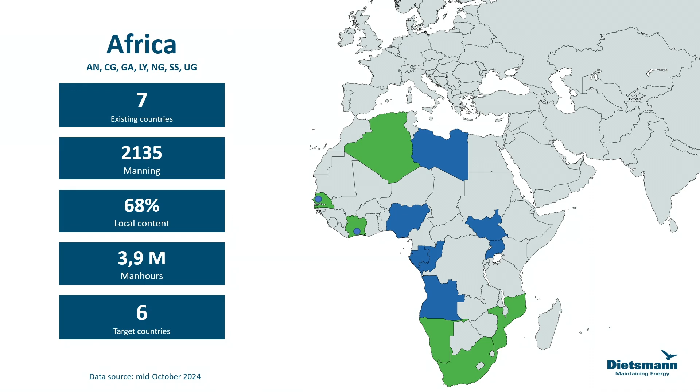Environmental data. We are very committed to the energy transition, and also to decreasing our emissions on the 3 scopes: scope 1, scope 2, and scope 3. Being a maintenance contractor, scope 2 is a little bit smaller compared to scope 1. Scope 3 is mainly based on the logistics, on the travels that our people are subject to reach the different sites. We set a parkour to become net zero in 2040.

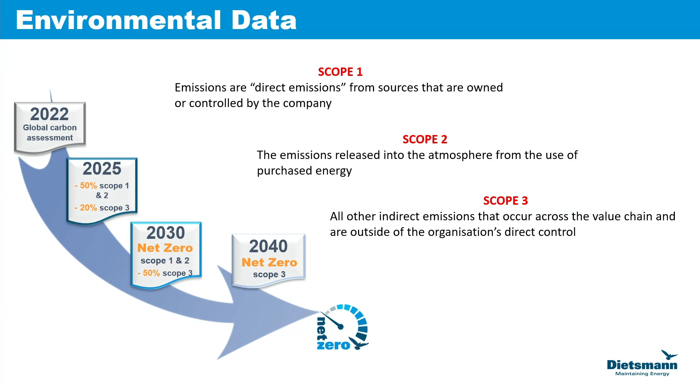So basically, we had an assessment 2 years ago. In 2025, we are expected to reduce by 50% our emissions of scope 1 and 2, and minus 20% on scope 3. By 2030, we will become net zero on scope 1 and 2, and then 2040, as I said before, it's our target for scope 3.

This is a picture of how much emission we have today within our company. As I said before, scope 2 is a little bit smaller than the others. The vast majority is scope 1 and scope 3.

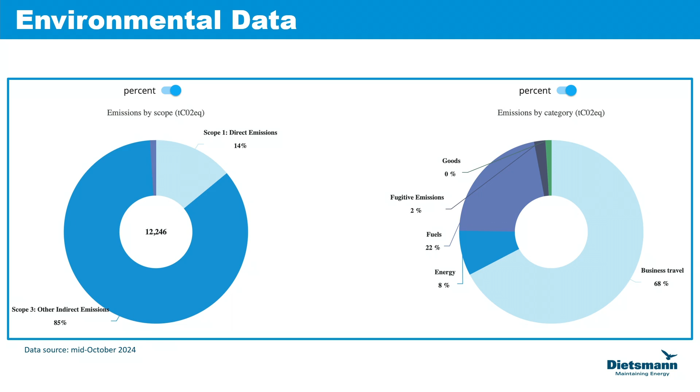Maintenance strategy. We are a maintenance service provider, so we know very well how maintenance has to be done. The difference between the past, the present, and the future is how we would like to improve the maintenance strategy on our side, but also in collaboration with our clients.

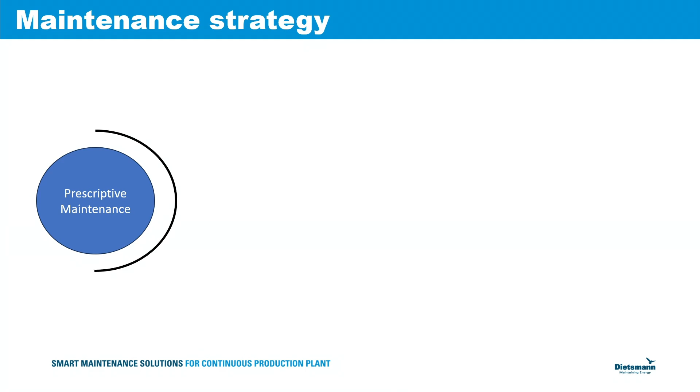We would like to go to the point that prescriptive maintenance would be our pillar, our unique value proposition. Prescriptive maintenance will allow us to reschedule the preventative maintenance, to reduce the maintenance cost. This is very important also for our clients, to improve the workforce, because the manual activities will be developed into something more modern, decrease the unplanned downtime, so for the clients in terms of production, flow rate, and availability, there will be a big step up in reliability and availability.

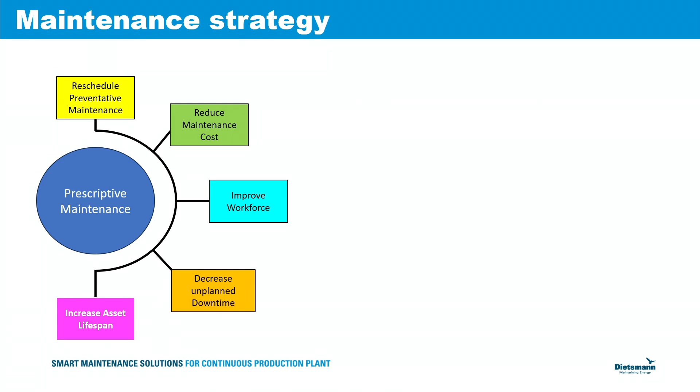And we would like to participate in increasing their asset lifespan. Basically, the delay is one of the key components of what we are working on, so we try to reduce as much as possible the delay in moving our people throughout the different sites.

The backlog, if corrective maintenance, reactive maintenance is what you're doing, the backlog is always a big problem for the contractor, but also for the client. So by going to prescriptive maintenance, the backlog would reduce dramatically.

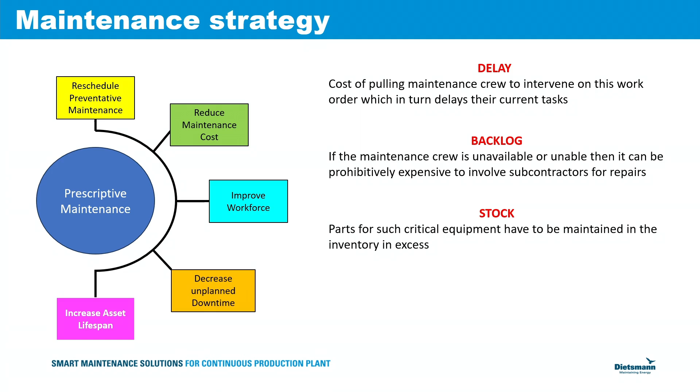The stock, if you implement prescriptive maintenance instead of preventive maintenance, is a huge component on the client cost side, would be dramatically reduced because you would purchase the parts just in time for the replacement. And the shipment of the parts, that is one of the worst nightmares of the client, but also of the contractor, will be optimized by ordering them according to the necessity on site.

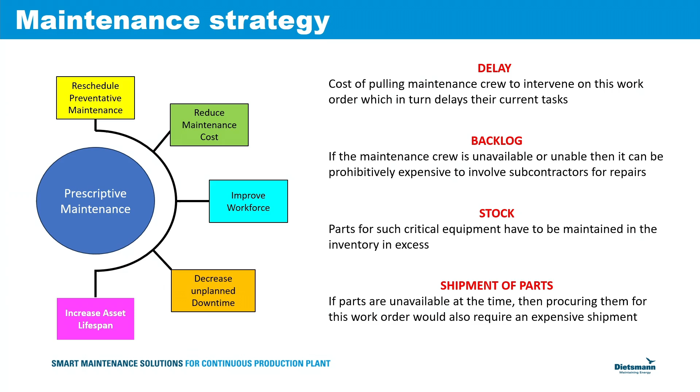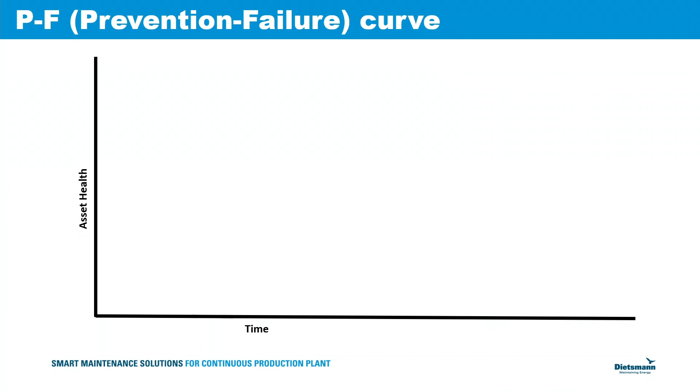Let's talk briefly about the prevention failure curve, that is the heart of this concept. So if on the y-axis we put the asset health and on the x-axis we put the time, we see that for any assets on site there's a decrease of asset health throughout the years.

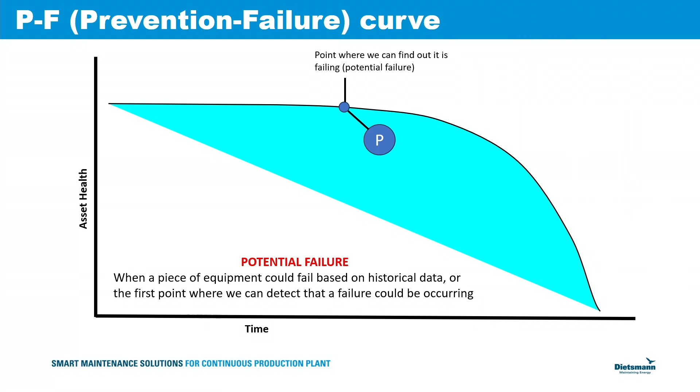So we talk about the potential failure, that is the point where you can find out that something is failing. There's a detection that the failure is there. Of course, there's also a point where the breakdown occurs.

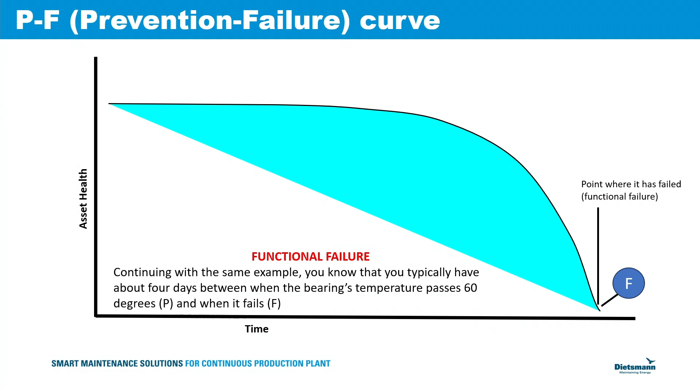So the functional failure is the point where you need to intervene and correct the failure. Compared to the life of a bearing, a very simple example, the potential failure is when a bearing would go over 60 degrees. This is something you detect basically by the instrumentation, and that gives enough time to replace the bearing.

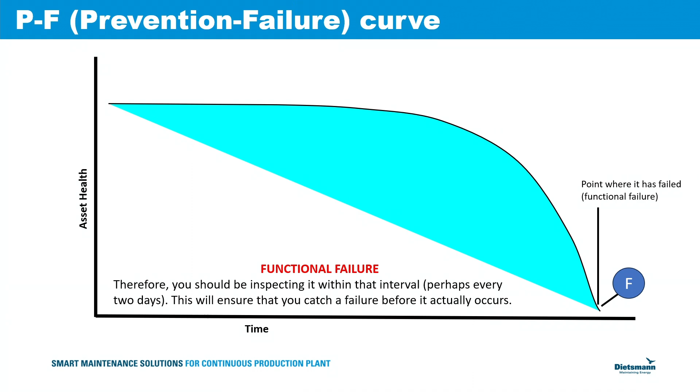The functional failure, of course, dictates the time between the occurrence of the failure and the detection of the failure. And this is where we would like to intervene thanks to artificial intelligence.

The point where the failure starts to occur is not necessarily related to age. You may have it also on new sites, on new installations, because many elements can be behind a failure. So our program is dedicated to old sites as well as new sites.

Potential versus functional. If you can increase the time between the point in which you detect the failure and the point where it actually occurs, that would give ample time for your teams to plan the intervention, to agree with the client the right time to stop the machine, and of course you can improve the reliability.

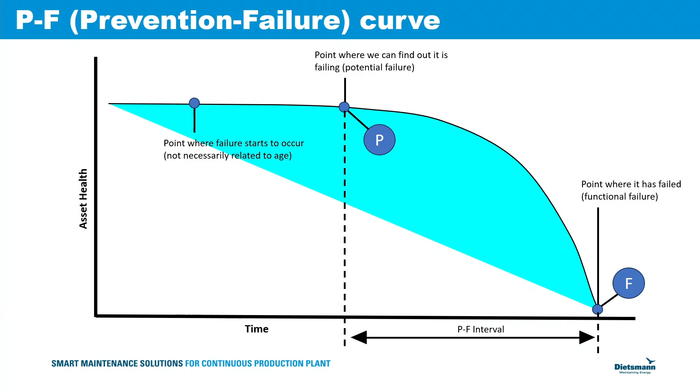Because you already know when the failures will occur, but you can also concur in raising the uptime of the entire facility. This is the PF interval, something we will work on extensively thanks to digital twins and artificial intelligence.

Of course, we try to enlarge this time as much as possible, to have ample time to order the spares, to program, to plan, to get the teams on site for the intervention.

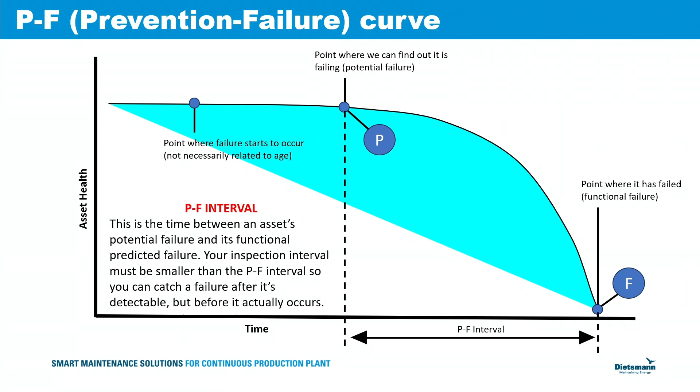What does it mean? That you schedule better the maintenance. So, of course, there will be no last-minute parts delivery, which is also very dangerous for an oil and gas as well as a power station installation.

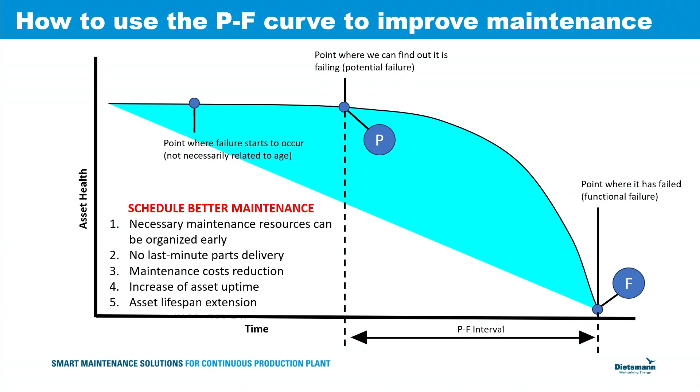You would reduce the cost of the maintenance, because you will order the parts just in time when you need them. So basically the stock in the warehouse of the client will be reduced to the minimum. And then, of course, you increase the asset uptime.

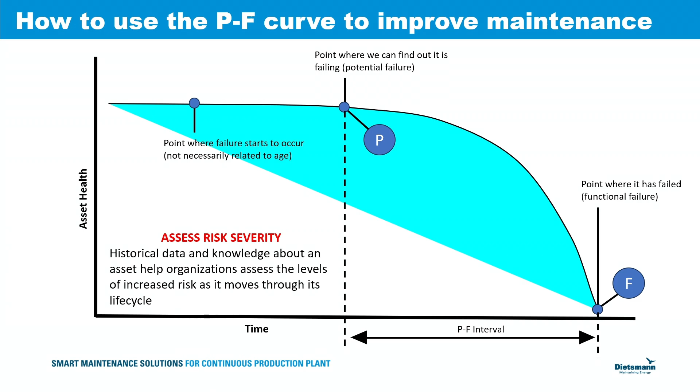The risk severity - in corrective and preventive maintenance, the asset risk is always very difficult to assess in terms of severity. Here, thanks to the historical data and data analytics, you can customize and really set the severity of any and each of the failures that are going to occur.

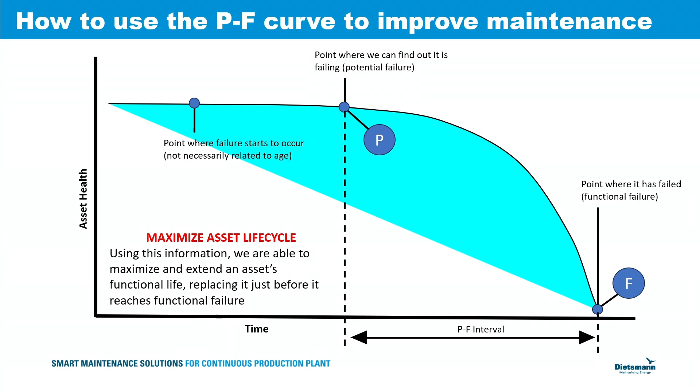There's also a very good contribution in the asset life cycle, because of course you would reduce to zero the unnecessary interventions. You will focus only on something that is extremely vital for the asset and for the entire plant.

Of course, the beauty of it is that Dietsmann collaborates with the clients, and our next target would be to collaborate with the EPC contractors. Because if you can already inject this technology, this concept at a FEED level, at an EPC level, from day one, the client would benefit from having already a maintenance strategy towards prescriptive maintenance.

If a client invests after the startup, it may be already too late for having a good reliability and a good availability of the plant.

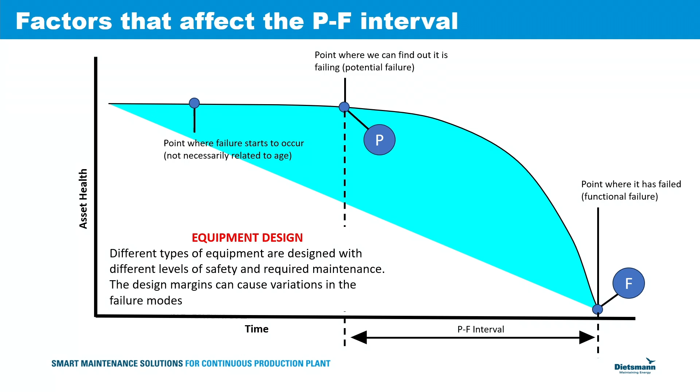There are some factors that may affect this study, the frequency of use. So basically, how you process, how you manage the production. That's why I was talking about operations.

For us, having guys on both sides of the plant, on the maintenance side but also on the operations side, allows a very good understanding of the reciprocal needs.

Maintenance and operations, if taken apart, usually don't communicate, and some problems that stem from operations, if not promptly shared with maintenance, can create huge problems on the maintenance side. Conversely, if the maintenance guys do not share what their intervention was about, the operational people cannot improve the process management. So when we talk about operation and maintenance, it's a joint effort from both the maintenance and the operation guys.

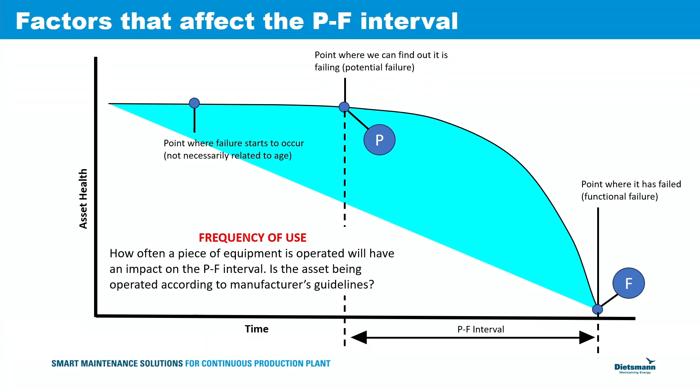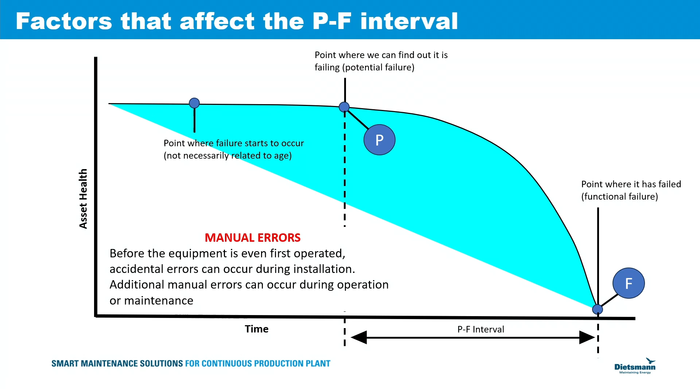Manual errors: statistically, if you operate frequently on a machine, the room for errors can be quite high, notwithstanding the training, the competence, the skills. Human errors, especially in a rush, can be there. So by reducing the frequency of intervention and the activities at site, we would reduce, not to zero, but to a very low level, the room for errors.

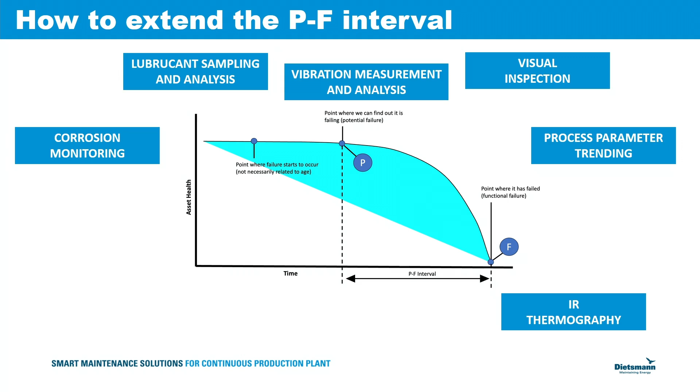How can we go all the way to prescriptive maintenance? We have different components: corrosion monitoring, lubricant sampling and analysis, vibration measurement and analysis, visual inspection, process parameter trending, infrared thermography, acoustic emission detection, and motor current analysis for electrical equipment. Those are components that are already there.

Our target is to integrate all those activities into a package that is, for most of it, automated and managed by artificial intelligence.

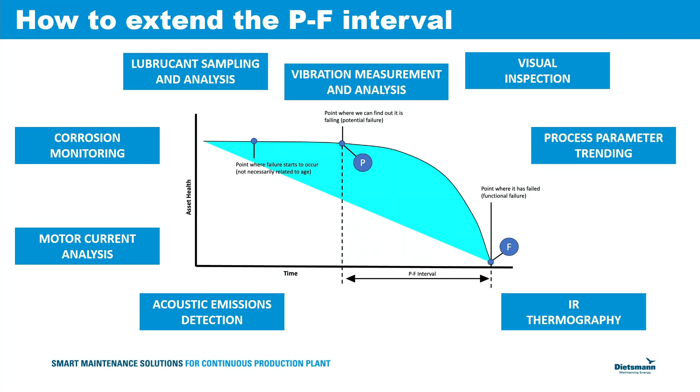The data acquisition would be on each and every second. To be honest, the pickup frequency is 30 milliseconds, so it's real-time data capturing. This generates a huge volume of data that is very vital for forecasting and prediction, but it's impossible for this amount of data to be managed by engineers. So artificial intelligence is a necessary tool to translate this huge amount of data into something suitable for human beings and engineers.

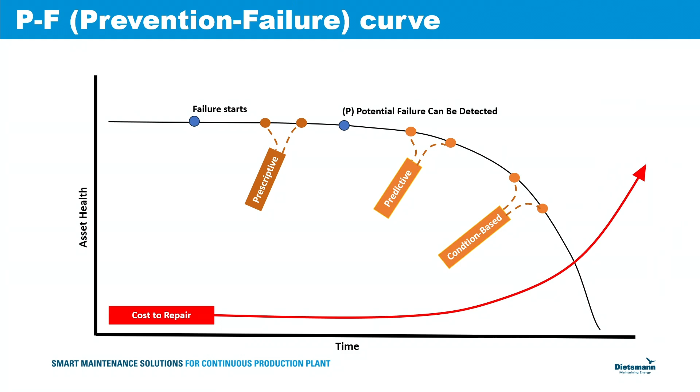But the beauty is that, thanks to prescriptive maintenance, you would be ahead of the detection that is possible today. Today you can only detect the failure after point P. With predictive maintenance, you can only be there. With prescriptive maintenance, you will be ahead of the detection. That's a huge step up in improving the detection of failures and the maintenance quality for our clients.

This is the whole life cycle for preventative maintenance. When you talk about maintenance based on time, it involves a very large span of time—huge investment, huge cost, huge manpower need at site. If you focus on prescriptive maintenance, you can reduce the cost, reduce the requirements for workforce, and also the requirements in terms of parts.

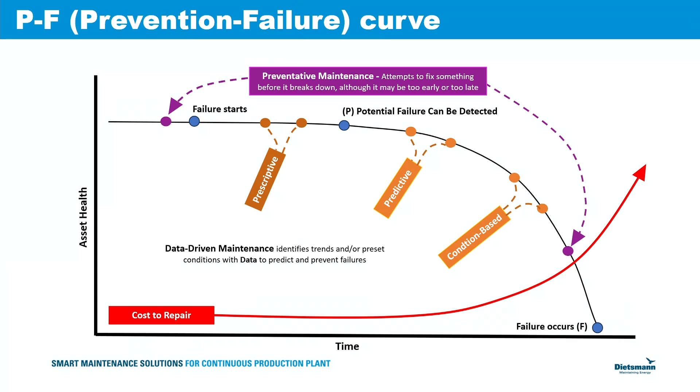This is our goal: maintenance will become very soon driven by data. Acquisition and capturing of data on a real-time basis will allow us to analyze that data and give guidelines to engineers and planners to plan the maintenance according to real and actual needs.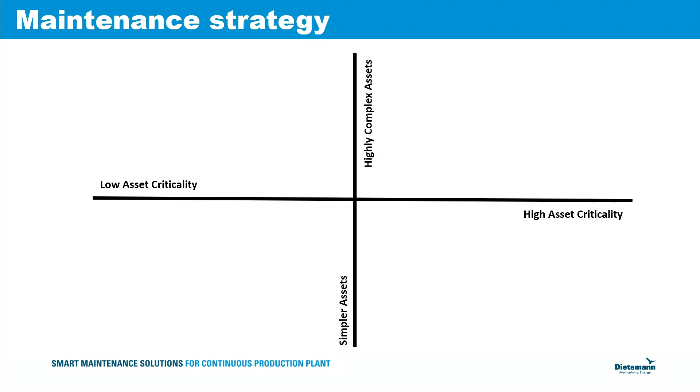Let's speak about what convenience a client can have switching from one type of maintenance to another. If criticality is low to the left and high to the right, and assets are simpler at the bottom and highly complex at the top, here is where usually you are with reactive maintenance—it applies to sites low in criticality and low in complexity. Preventative is somehow more critical, moving towards something more critical and less simple. Condition-based maintenance is somehow there. Predictive, today's most advanced methodology, becomes more interesting where sites are complex and also very critical for export, in terms of electricity or oil and gas production.

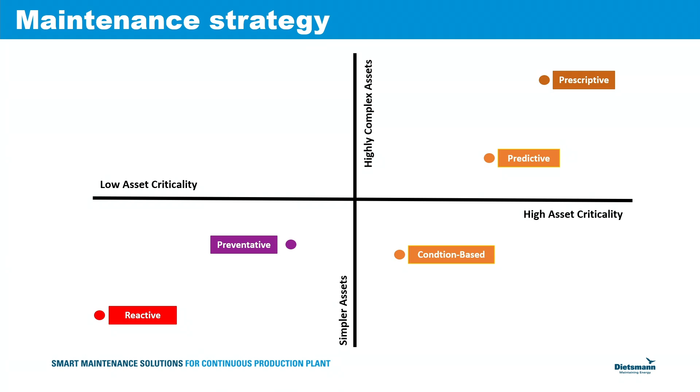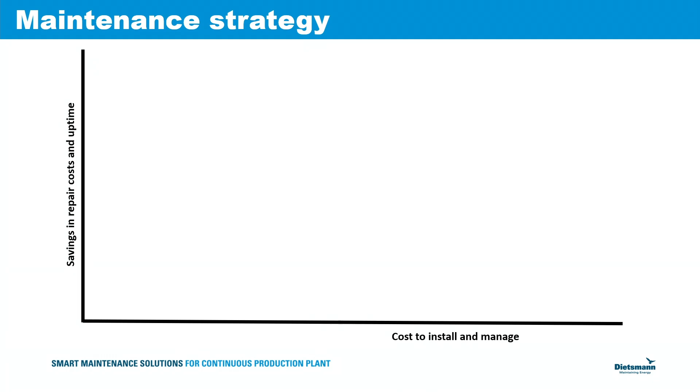Prescriptive is really the pinnacle, the top of everything. Every time you have an asset that is very complex and highly critical for the client, prescriptive maintenance is the answer to the client's needs. In terms of savings and cost reduction on the y-axis versus the cost to install and manage prescriptive maintenance, reactive is very low—it applies where cost reduction isn't so important, but also where investments are quite low and limited.

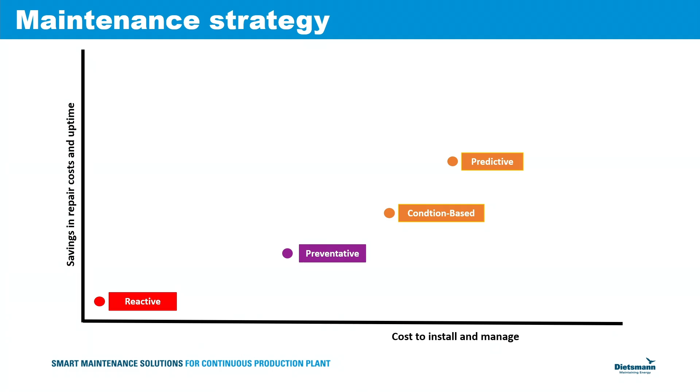Preventative requires additional investments, but also the savings is a little bit higher than reactive. Condition-based, of course, is halfway between preventative and predictive. Prescriptive sets somehow there, and you see that the upfront investment, a one-off investment by the client in terms of sensors and by the contractors in terms of artificial intelligence, would pay off in savings in terms of cost reduction. So prescriptive maintenance on the long run is the answer also to cost reduction.

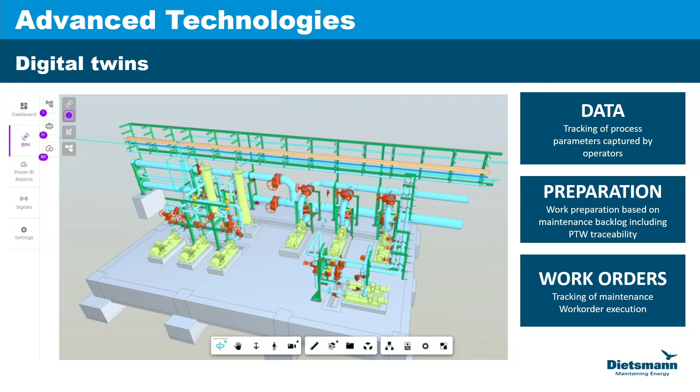Let me give you a very brief overview on our new advanced technologies. So the digital twin is a digital simulation on how the sites work. It allows the data collection, it allows the maintenance preparation, and it also allows the work order management. By having sensors, you can translate the analogic indications into something that is digital.

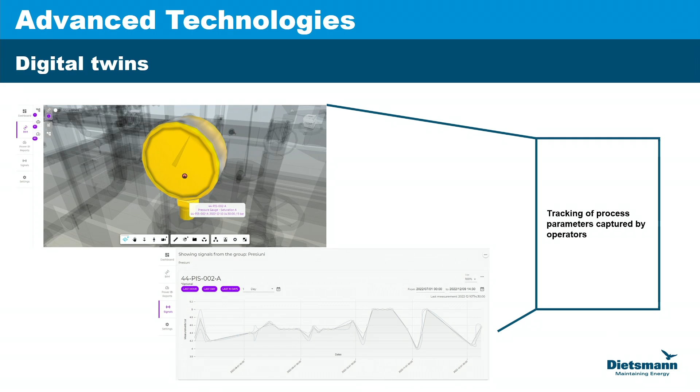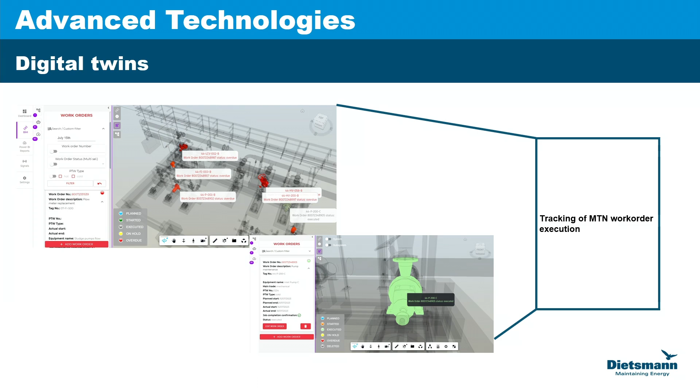For the artificial intelligence this is extremely important. You can manage the work preparation and also the permit to work, so you can decrease the time to prepare the intervention. And then you can track the work order execution, so the client is being kept up to date via mobile phones or other kinds of interfaces on the progress of the intervention.

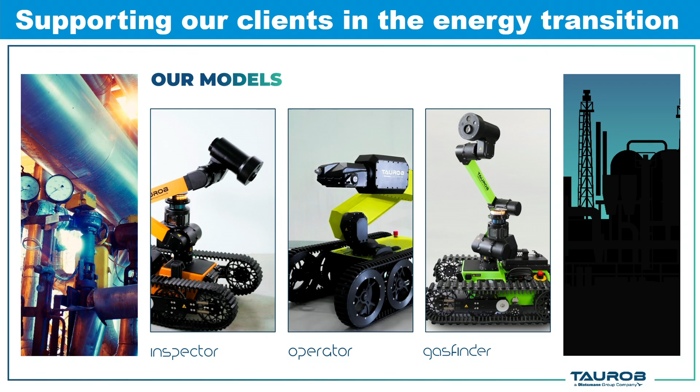In terms of robotics, I'm trying to be brief. We have three models: the inspector, the operator, and the gas finder. The beauty of having the robots operational at site is that you can conduct completely automated, unmanned inspections. The robots can carry out inspections without any control by human beings.

You can get the data acquisition done because the robots are equipped with sensors to collect vibration, infrared thermography, and other sources of data. The robots have installed software so they can get an elaboration of data already aboard the robot. So when the robot downloads or uploads the data into the cloud, where we have all the artificial intelligence, this data is already somehow processed and sorted and filtered by the robots by importance and by consistency.

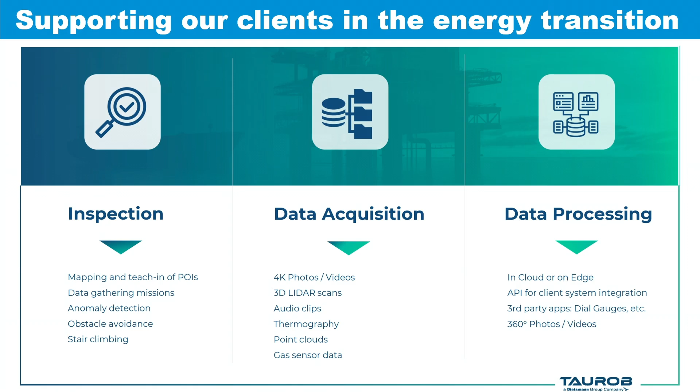We are very much committed to emission reduction, as I said before, not only for us but also for the client. Our gas finder robot can detect very small methane leaks, and this is very good for the client because methane is 36 times worse than carbon dioxide in terms of pollution.

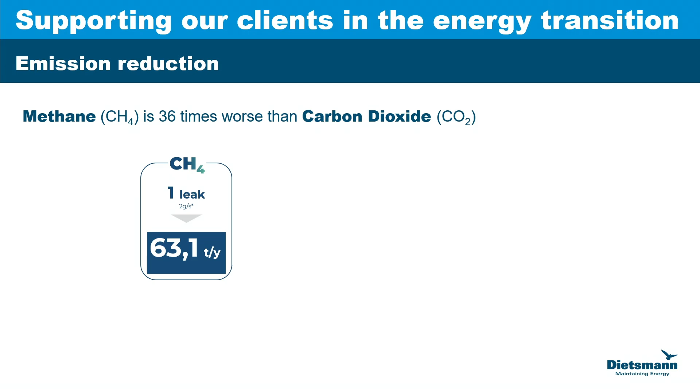If you take the example of one small leak, 2 grams per second, that generates 63 tons per year of emission in the atmosphere. If you translate that into CO2, then you would go to 0.2 megaton per year per site, providing that every year at site you have 100 leaks of methane.

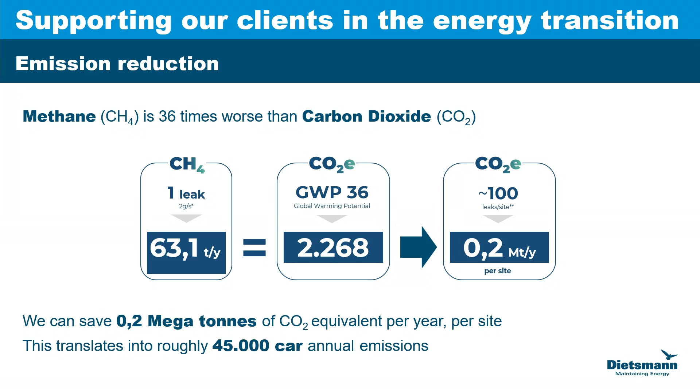Translate that into emission of cars, which is more familiar to everybody. That would be, for each site per year, the equivalent of 45,000 cars. That is rather impressive in terms of emission reduction. Thank you very much for your attention. If you have any questions, I would be happy to try to reply.

Thank you so much, sir. I only have one question for you as we wrap up. How does the advancement of artificial intelligence serve operational processes at your company?

It's something we are experiencing at this time because artificial intelligence is based on machine learning, and you need some time, at least at the beginning. So when I talked about investment, it's not only money, but it's also time. Roughly for a low complexity site, we are talking about some weeks. For a normal complexity site, it can go up to 6 months. But after 6 months, the artificial intelligence is already generating predictions for the next 3 to 4 weeks. So 6 months is the normal lifespan for artificial intelligence to become operational and effective.

And then how does it mitigate human error? It's based on the frequency of the interventions. The less you go intervening at site, the less your people are exposed to HSE risks, because we operate in a cold environment in terms of safety, but hot environment in terms of process. The plant is not shut when you intervene, so other equipment around you may hurt or cause a risk for your people. So limiting the exposure of your people to risk is already a reduction in stress, and that stress would create errors on their side. So the less they intervene, the less they are stressed out, the less they can make errors.